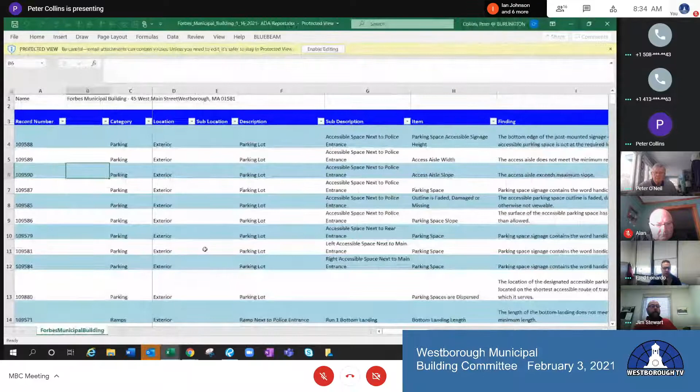I'd rather go back, Peter, if we can, just go back to the email. Certainly, that's the actual Excel report. So there's four major areas, if you will, that I still see as our potential to be addressed. The first one, I've talked to the facilities director. He and I are in agreement that if certain issues come up, the town will be liable for them. Some of those items are itemized, like the toilet paper holder.

There's some contention on how those toilet paper holders actually work, that you could actually have one of the toilet paper rolls at a higher place in the dispenser. So we think that may actually be compliant. But if we really get a complaint, Jim's agreed that we could look at replacing those with a different type of dispenser.

There was the numbering on the doors, that's completely, I wouldn't say completely out of whack. There's many doors that in the report aren't either in the right location, height, whatever. There's a variety of issues with the placement of the room numbering.

Again, we don't think at this point, the big thing are the bathrooms. We don't want people going to the wrong bathroom, obviously, so those are okay. Most of the public spaces, the fire room, those type of rooms are okay. It's the individual rooms, the stairwells, where they reported that the signs may not be at the right place. Rather than change all those wholesale, we'll leave those. There's nothing in the building code that I recall that actually requires labeling some of these rooms.

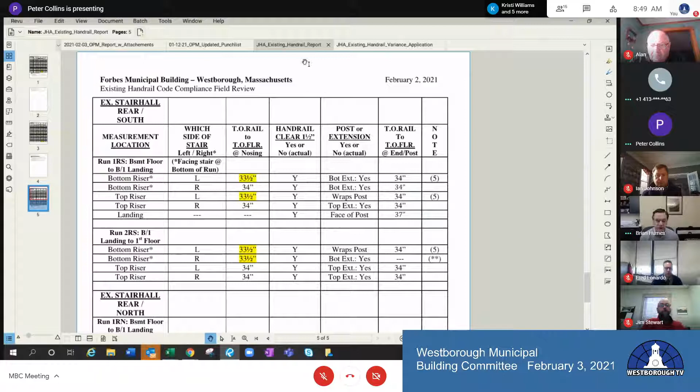I thought I needed a little more information on the actual conditions before I'd have to certify a variance request. So I sent Kevin to the Forbes building to do an analysis of the existing stairway and try to document what deficiencies were there, so we could certify those and be responsible for them in a variance request.

So there are 4 stairwells, and this is where it gets a little confusing, because when you're talking about these stairwells, they traverse 4 floors, and there's a left handrail and a right handrail. There are landings, and a lot of conditions within those stairs, which we needed to try to get to the bottom of.

Now we have measurement locations for the first floor, for the first to second landing, from the second floor. The second column is whether it's the left side of the stair or the right side of the stair, which handrail we're talking about. And there are certain conditions that we needed to verify.

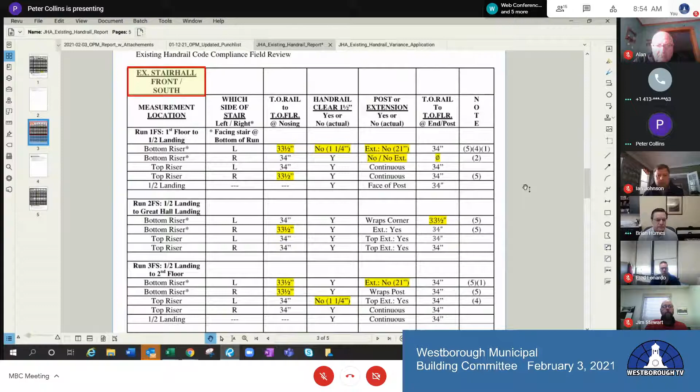Keep scrolling down, you can see where the yellow shows up. That's where we're finding a little bit of non-compliance. Again, it's just in small increments of 1/2 inch. Nothing really major.

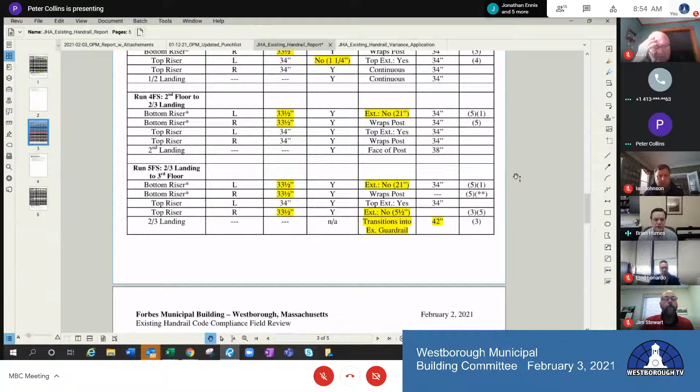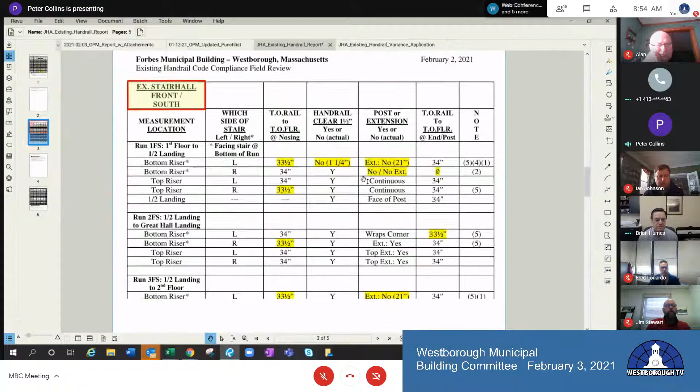When we get to, just go back to what you had. Okay, that's front stair south. Oops, I'm sorry Brian, which one? I apologize, a little more, a little down, a little more. Okay there, if you go to the bottom of the page, just above it says 2/3 landing, transitions into existing

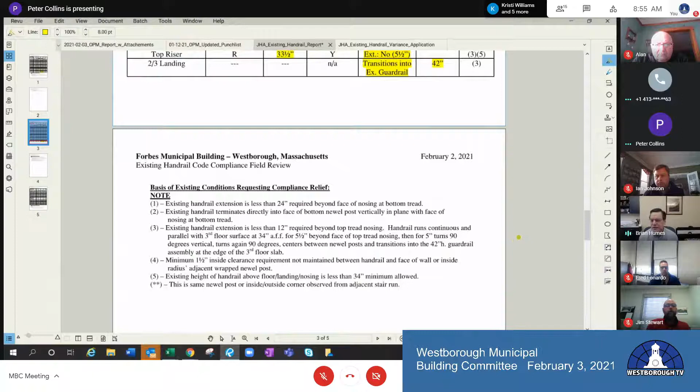guardrail at 42 inches. That's what's happening at the top of the stair. As the handrail comes to the top of the stair, it transitions to the last column on that page that's in yellow, 42 inches. The handrails come to the top of the stairs, all the way at the top landing, and they transition from a handrail to a guardrail. It's kind of an interesting design that they've implemented, but it comes to the top of the stair and goes from a 34-inch dimension. It turns up vertically and then horizontally to the sidewall.

So the handrail contorts itself to become the guardrail. In doing that, it brings it out of compliance for a handrail height, but into compliance for a guardrail height. It's just the way it was designed and built, and it's been in this condition since 1999, or for 20 plus years. So that's just a condition at those front stairs.

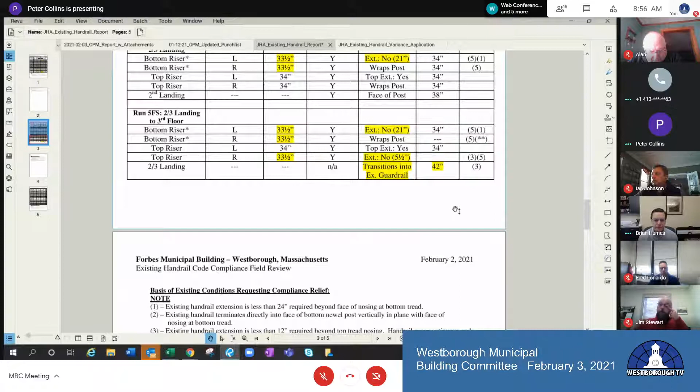And now we've looked at the 2 rear stairs. That's what this sheet is, existing stair hall rear south. We're finding handrail clearances are good. Handrail heights are off by 1/2 inch in certain conditions. It's the left rail, not the right rail.

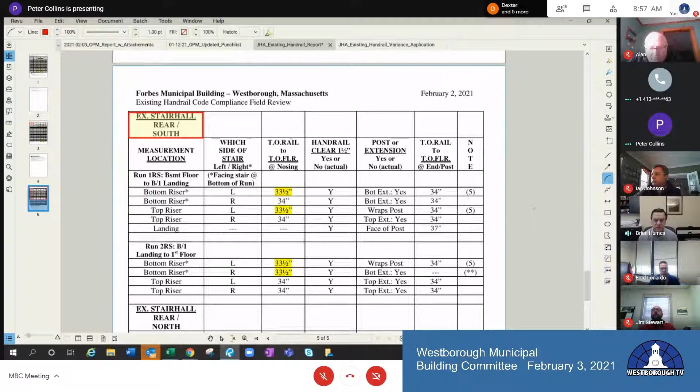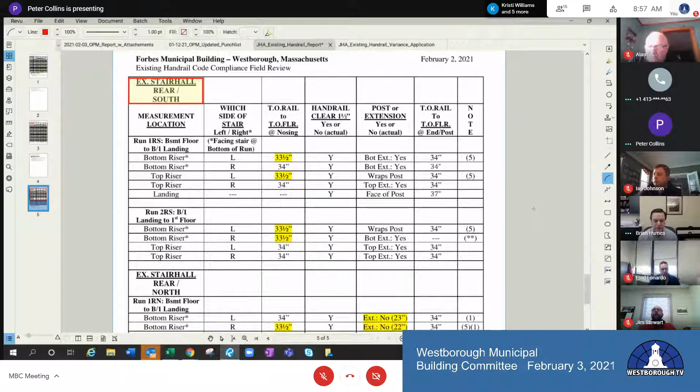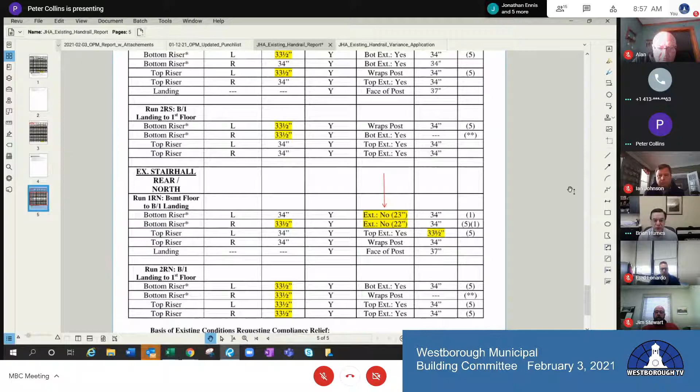When you're talking about extensions, required extensions at the bottom of the stair for a handrail extension, that's required to be 24 inches. On these stairs in the rear, we're finding that they meet the requirements. We had modified those stairs, those handrails at the bottom of stairs on the south, but the existing stair hall rear north, you can see that we have a 23-inch and a 22-inch extension, where code requires 24 inches. So we're off by 1 inch, 2 inches. It's not a major deviation, but those are the conditions that we're looking to get a variance for.

So any questions on just our investigative work?

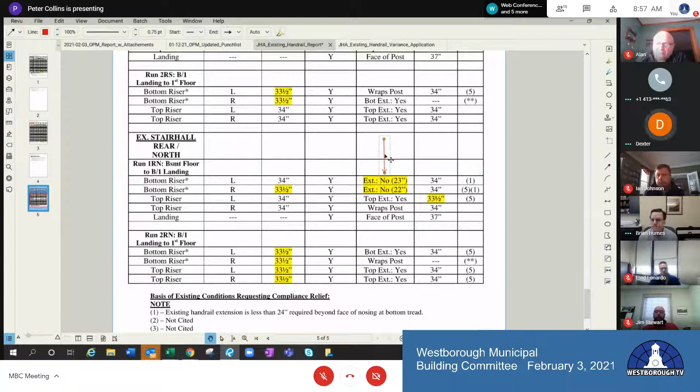Yeah Brian, I have one, Brian. Alan, if I may. Yeah, on the one where you mentioned the transition from a handrail to a guardrail at the top, where it went to 42 inches. What's the significance of that?

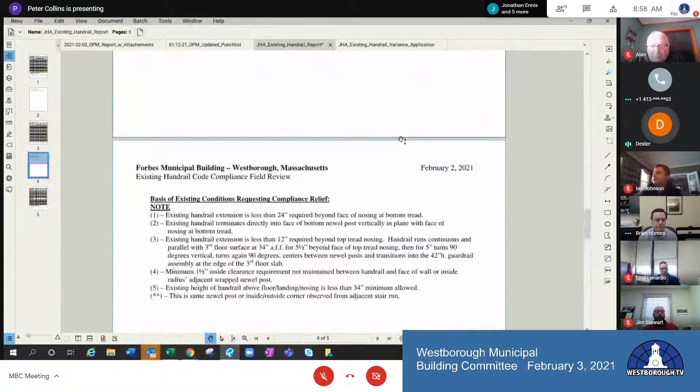If it's a guardrail, it's a guardrail. I mean, at the top of the landing where there's a fence so that you don't drop over into the next floor, it's not a handrail, it doesn't act as a handrail. It is a guardrail. So why is that an issue?

Well, at that condition, you're still required to have both. You're required to have a handrail extension, even though there's no stairs there. There's nothing that you can do other than drop off the world if it wasn't there.

You have to have the guardrail. One way to think about it, Dexter, is if you're walking down the stairs, you're holding the handrail, but you also have a guardrail that's beside the rail. So that same design should be extended to the topmost landing. The handrail would then extend and stop, but the guardrail would still turn and create conditions of safety. So you're saying there's a guardrail along all the stairwells as well as a handrail?

Yes, and what we've done in the renovation design, we extended the heights of the guardrails on those stairs. We did not change the condition of the handrails. What we did do is cut off the newel posts, extend the newel posts higher, and create a higher guardrail dimension, all without touching the handrail. But when you got to the top of the stairs, the handrail transitions higher to be the guardrail. So it's not something that would be a compliant design today.

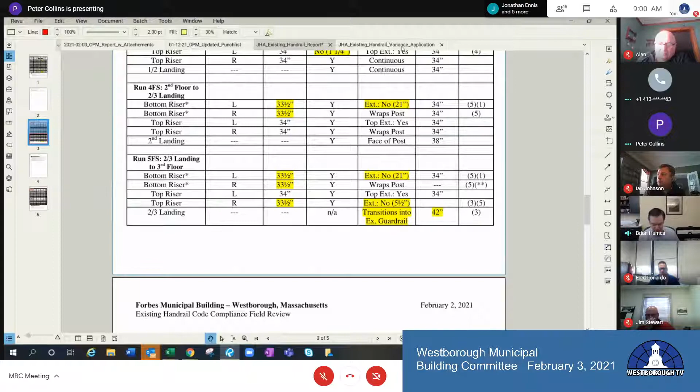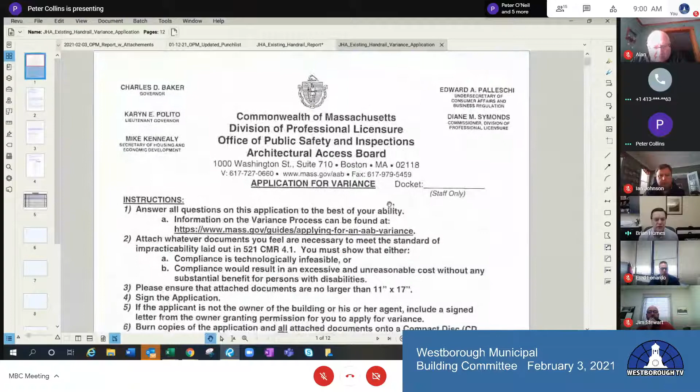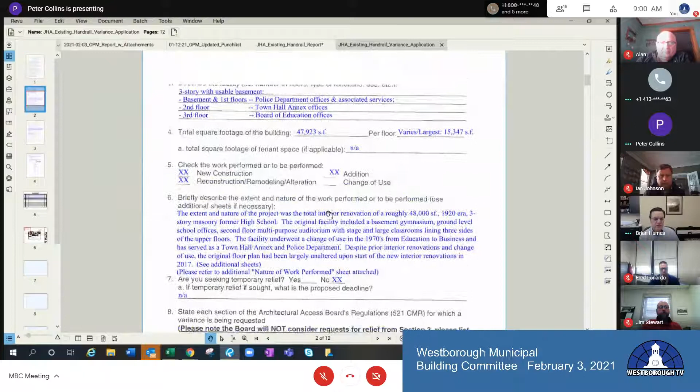So the next thing I sent you, Peter, was a variance request. We've taken that data and put it back into this application for a variance. We kind of patterned it off the one we had already submitted, so a lot of this information in the first few pages is repeat documentation. All of that data is data that we had from the former application. We had to change some of the wording because we're reapplying just for handrails at this point, but a lot of this data is still applicable.

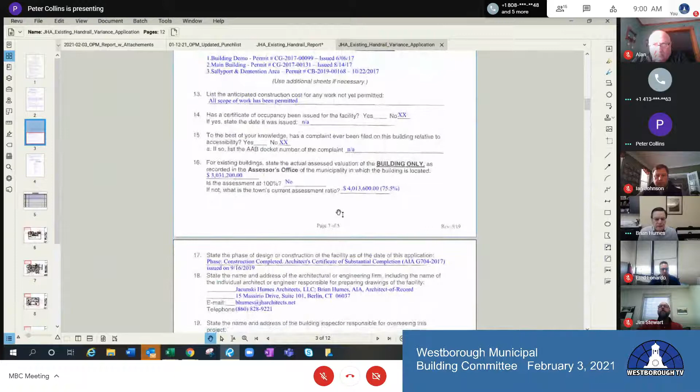It just states who you are and what variances you're requesting, cost of the building, and so on. So we'll get to the next page and you'll see items 2, 3, 4, and 5. In the past documentation there was number 1, so this is a continuation sheet, but we're actually asking for a variance for 5 conditions. Those 5 conditions are in multiple locations, but they still come down to just 5 basic things we're asking for.

One has to do with the 1.5-inch clearance. Some has to do with the 34 to 36 inch heights. If you look at number 5, that's the CMR condition, the ADA condition we're asking a variance for. The next column says location, and it says multiple locations. So existing handrail is less than 34 inches between top of handrail and top of floor landing nosing, where 34 to 38 is required. We're at 33.5 in a lot of these conditions. That's just one of the 5 items, but it's all over the place. It's in 3 of the 4 stairwells.

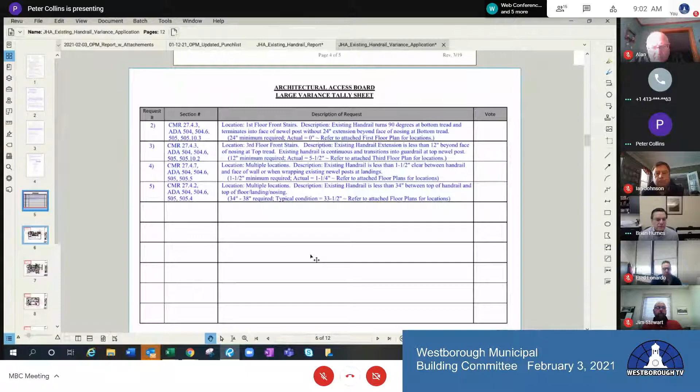So if you go to the next page and scroll out, in the upper left are the 5 conditions, and in those 2 rear stairwells we point to specifically where we found those deficiencies within that stairwell. The one to the left, the rear stair south, we're just asking for condition 5 at those 3 locations. So if the board was looking at this, they'd have some way to visually see where those conditions occur. I don't know if this makes our condition better or worse, but we wanted to be truthful as to where it was and how often it occurs, even though it's the same condition.

It's just half an inch out of compliance. It's not along the entire rail, but it's at those conditions at the rail. And we go visually for the next 4 pages. You can click on that one, Peter. So on this floor there's nothing in the rear stairs, it's only in the front stairs on this floor. Same 5 conditions, but we're just identifying where they're located.

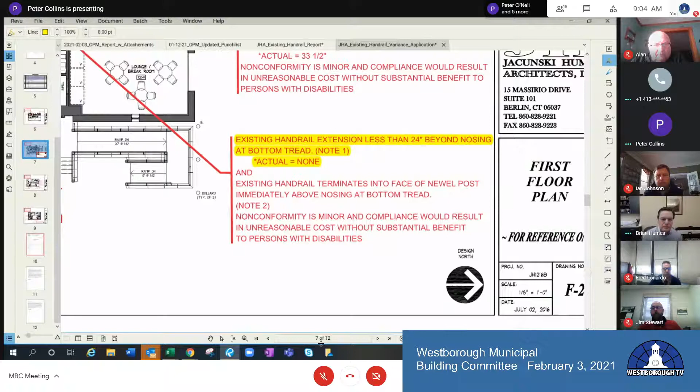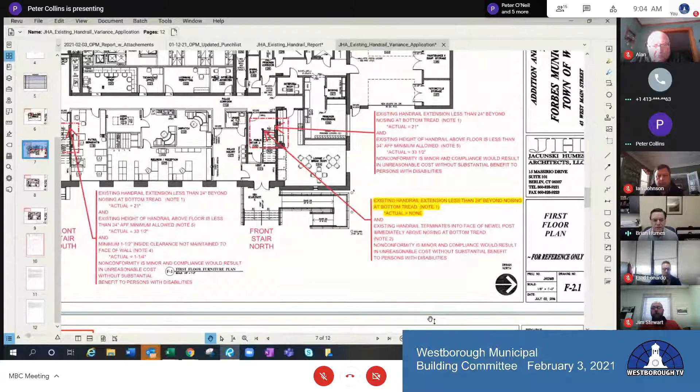These have to do with—I'll take the note in the bottom right for this—the 24 inches, so this is note 1, it's a handrail extension. The actual is we don't have an extension here at this condition, and we're required to have 24 inches. So for that condition they might grant you a variance, they may not. I don't know, because at this condition we have no handrail extension, but it's right at the bottom of the stairs, so we would actually be blocking some passage dimensioning at that bottom stair. That handrail at that condition just dies into the newel post. If it was extended 24 inches into that landing, we'd be reducing the landing width by 24 inches.

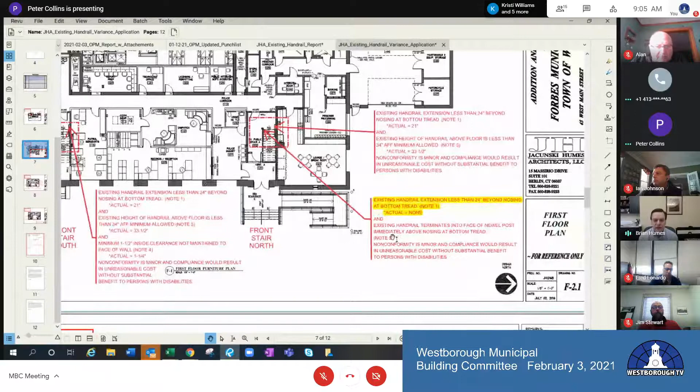So it's an existing condition, something that is part of the building, inherent to the way it was constructed. I'm hoping they give you a variance. The note just above that we looked at, the handrail to the right coming down the stairs, doesn't extend 24 inches, it extends actually 21 inches. So that's the note above. The handrail extends, but only on one side, and on the other side it just dives into the newel post.

So on the right side, it's at 33.5 at that condition instead of 34.

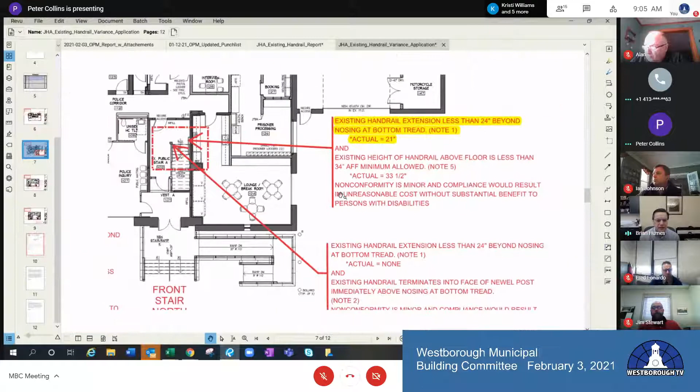I think we're now confident that we have the right information. The question is what's the best way to convey this to get a variance request. It was confusing for us to even contemplate how to do it, and we think this accomplishes it, but that's why we're presenting it to you to see if it makes sense or if it's actually a little confusing. So the next page, Peter, goes up to the next floor.

Again, there's no rear stair at this condition. When you get up to the second floor, there's only the 2 front stairs that extend up to this floor. So there's just parts and pieces that are still the same 5 items, though. It's not any different than we've talked about before. It's just showing it on this floor.

Brian, if I could interrupt just a minute before Fred leaves. I'm interested, Fred, in what your take on this is from your professional perspective.

Thanks, Dexter. So just a couple minor clarifications. One, Brian, you mentioned that the entire handrail is not off. That may or may not be true because Kevin measured the top and bottom risers. It's possible that somewhere in the middle too, albeit the deviation is not much. Like you said, if you get 33.5, it's possible somewhere in the mid handrail you could also have a deviation. It may not be at 34. So I don't know that I'd necessarily say the whole handrail isn't off, or it may be off, but the deviation wouldn't be significant, assuming 33.5 is correct. It shouldn't deviate much, but it's possible the mid rail could be off too. That's just a minor point.

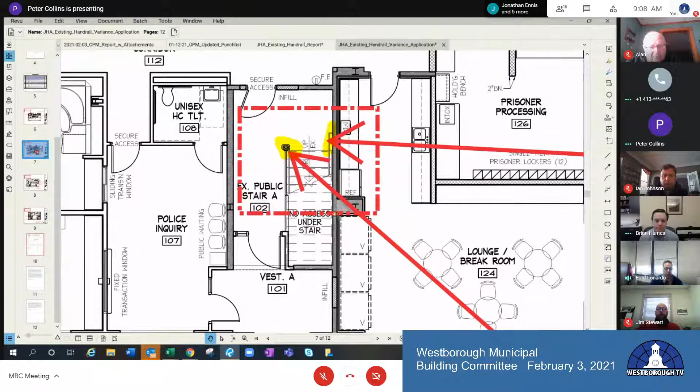I'd be curious to know how the board would rule on those. The one on the inside wall, yes, those have to extend a certain amount out because those don't present the same tripping hazard and they're not in the walking surface per se. No, otherwise, I think what Kevin and Brian have presented is good. Very good, actually. Thanks, Fred.

So the next page, Peter, just goes up to the uppermost floor. Again, we only have the 2 stairways in the front. Same conditions, same 5 items. This is the floor, though, that's showing how the handrail does contort itself to be the guardrail at the top of the stairs.

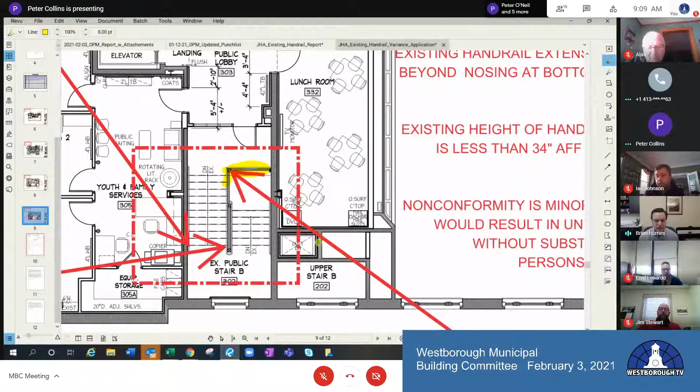So this would be some cutting and welding, extending the handrail height at least the 24 inches. And yeah, Fred, we could turn that 24 inches to be 90 degrees to the stairwell, but we still need that extension on the handrail independent of the guardrail. And those are happening at the top.

Yeah, so the handrail along the wall is compliant. The handrail along the wall gives you what you need at the top of the stairs. The handrail at the newel post doesn't.

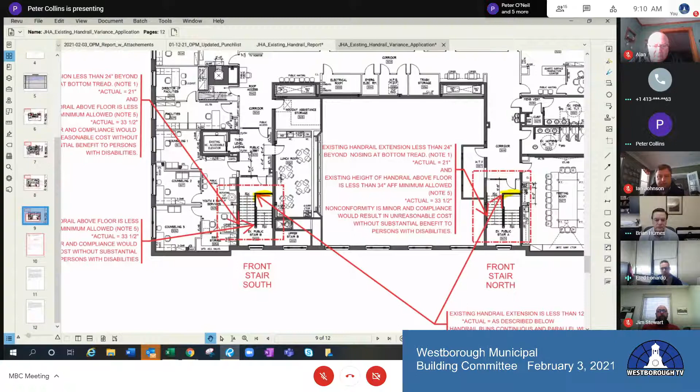If I may just interject, so Dex, that goes to your point, or your question earlier, is that at the bottom or the top of each landing, you're supposed to have some way to extend those handrails out or return them or bring them along. So you can't just transition from 34 to 38 inches and then just kind of gooseneck it up to 42 and consider that part of the extension, if you will. You can't do that. You have to make an independent extension or return or something from the handrail. You can't just go into the guardrail.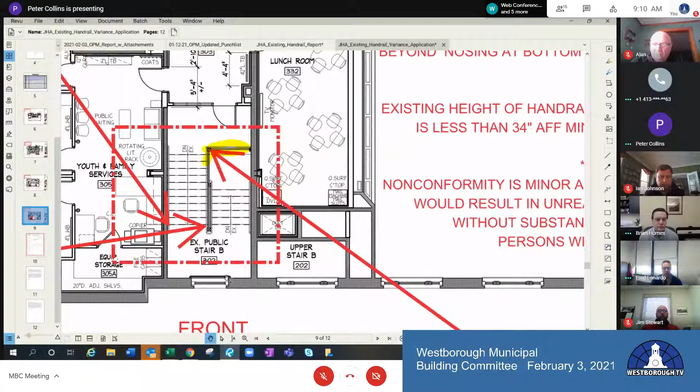And it's interesting that only happened in that one particular area. Surprised it didn't actually come up in other areas. So we're lucky in that regard. We only deviate in one spot, I guess. Yeah, it's only at the topmost landing in both stairs. It's the original design that we didn't deviate from.

So the next page is the letter we received from the town. I think this is the one Kristi wrote for the last variance, and I still think it applies, but the question is, do we want to update it for this variance with a new date, or just keep this same letter? I think it just says we're doing it on behalf of the owner. I'm comfortable if you want us to use this letter, or if you want to give us another one.

Kristi, how do you feel about that? I mean, I'll do either. It's simple to just print out a new letter with a new date, so if you want to do that. I don't think any of the information changes, so I don't think we'll have to. We'll put this letter into the variance request.

And I think that completes what we're planning on submitting. We wanted to show it to you first and see if you had any questions or modifications before we send it off. We have to send this out to Worcester again, to the advocacy group within your community, independent living center. We did that last time.

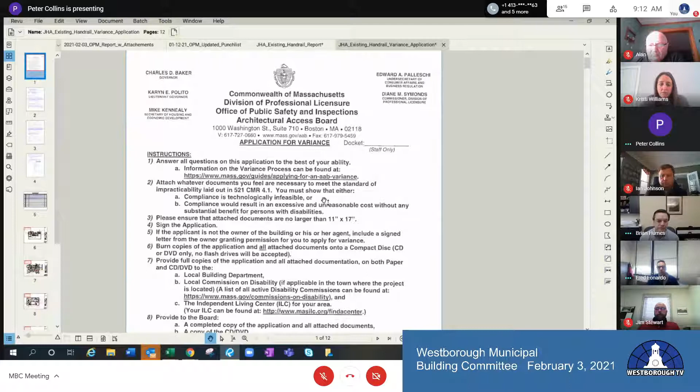Brian, if I may, the only question I'd have — and I think the presentation was great, thank you for doing all that — is, if I'm on the board, the one question I think might come up is, why didn't we apply for this originally? And it's okay to throw me under the bus on that response if you need to.

Well, I don't know if you also want to write a letter, Fred. We can add another letter to this if you want, since we have to submit this to you as part of our application process. So they know it's going to you, but you could always add a letter saying that you're in support of this. It may be something the board would read and know that we're not just doing it independent of your input.

Yeah, I can do that. I just don't know, if that question comes up, how we answer it. We were waiting to get more documentation, I guess. Yeah, that's a reasonable response. I don't think I'd put it anywhere, but I'd just be ready to answer that question should the committee ask you that.

That's the only thing I have as a comment. I think it makes sense that, based on the measurements being so close, that we as a town wanted to do our own independent measuring prior to applying for the variance.

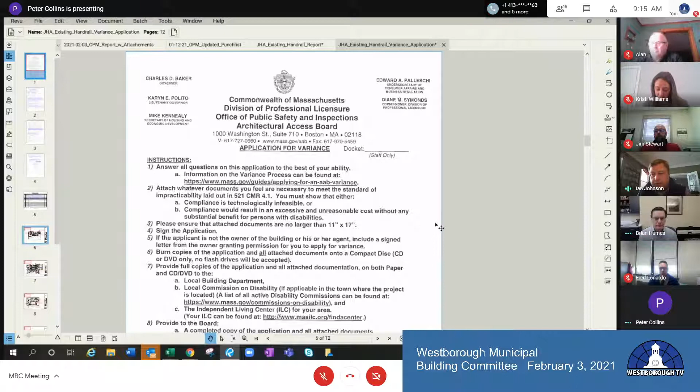Al, this is Ian, can I just make a — yes, go ahead, Ian. Sorry, and again, I'm by no means an expert on this, but I'm wondering — because when I look at this on the surface, with all the red on the maps and pointing stuff out at different points, it looks complex and there's a ton of things there — if there's a letter, whether a cover letter or something, that really highlights that.

While you'll see a lot of things here, they're really the same items in many spots, because a lot of it, when we looked at them, it's 33.5 versus 34 — not huge differences, and it's consistent being an old building. Whether that would help or not, I don't know what the board will say, but when I look at it at first glance, if I was on the board — which I'm glad I'm not — it would come across as, wow, this is way too much for us to grant a variance for.

So I guess my question is, is there any way to do something that just highlights this in a cover letter? Or maybe you've already done it. I guess that's my question.

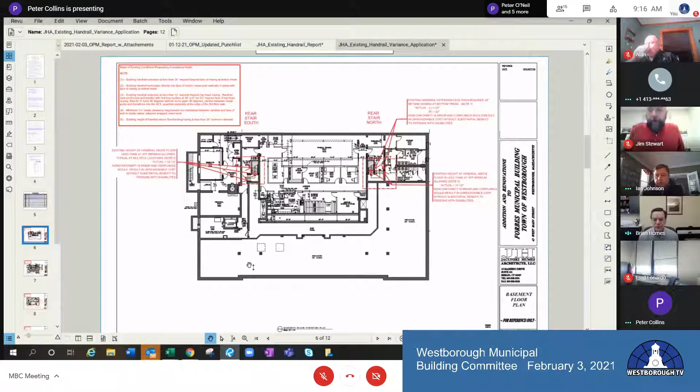We try to be transparent. We could have just not included all these diagrams and said we only have 5 conditions we want a variance for. Instead of a 24-inch extension, we want a variance to go to 21 inches. That's our worst case scenario, actually 0. But are we asking for a variance just to go to 0 instead of 24? Well, that only happens once, at 21 inches in 2 locations, 22 inches at a couple more locations. So that's where it became really complicated for us. We tried to boil this down to show them where these occur. The 24 inches we understand is the requirement, but are we asking to go to 0 in all cases?

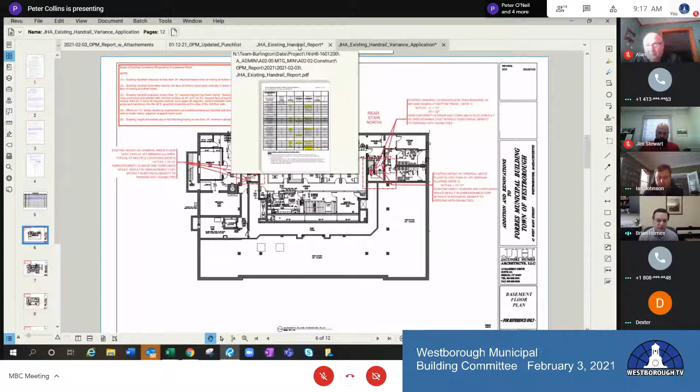No, we have extensions, but they're not to 24. If you take just one instance, eliminate all the maps, and just say, can we get a variance for everything that's in yellow on this chart? I don't know if that's enough information for them to really know the conditions at the stairs, where they are, how it's located. But we have all this documentation. It'd be nice to find a way to get this simplified, but I understand the concern with complexity. I think we're being accurate by what we're asking.

The deviations are really small, though. I don't want to make this seem like these stairwells are a public hazard. They're not. Walking up and down, the difference between 33.5 and 34 inches is imperceptible to the public. They still have handrails. You're not going to know the difference — it's only because I just told you that now you're aware of it.

So I think the 33.5 to 34 is going to be an easy one for them to get their hands around. The 21 to 22 versus 24, I think that's easy for them to get their head around. 1.5 inches to 1.25 inches, I think that's just what we're asking for, a modified relief. We have a couple oddballs where it goes up to 42, where we talked about the upper landings. I think they should be looking at those independently, and the mapping gives them the ability to do that. I'm encouraged, pretty positive about these other half-inch discrepancies. I think that's what the variance requests are for.

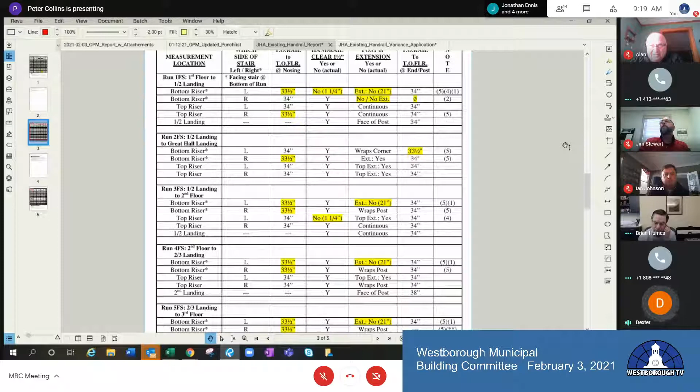Who's that question to? Is that question to me? Yeah — the original letter that went with the original application for the variances to the AAB, did you assist Kristi in writing that letter? No, we just requested a letter from the town.

Well, okay, Kristi, if you don't mind, can I ask Brian to help you draft a letter that's going to suffice for this next application for variances? Sure, yeah, that's fine. I mean, Fred and I just did this one — it's pretty simple, but happy to have more information. Brian, you've had experience doing this not only for Westborough but for other communities I'm sure. So perhaps your expertise in how to word this would be helpful.

Well, I think the letter you're referring to is all we needed from Kristi. That letter just gives me the authority on behalf of the town to submit the application. I think my letter was just this paragraph — the other stuff was written by Brian.

Okay, well so then, Alan, do we need a motion to authorize this to go forward? Yeah, we can take a vote on that. As we said initially, we're going to have Kristi resubmit the letter with a different date on it, and Fred's going to add a letter to it. If you think we need a motion, that's fine.

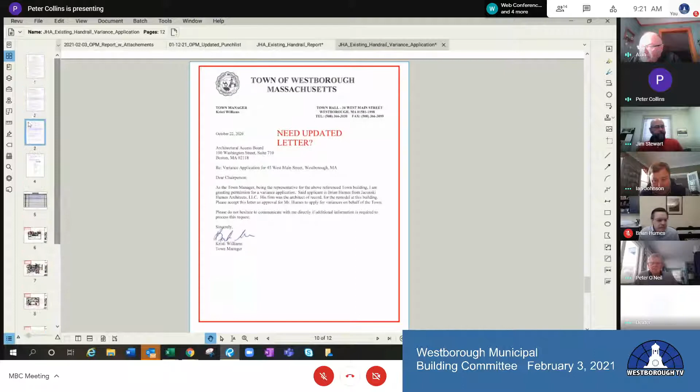A motion from Dexter. Do we have a second? I'll second that — Peter can second. Ian O'Neill, Ian Johnson second. Do we have any comments or questions? No comments, questions, so I'll do a roll call vote. Dexter? Aye. Peter O'Neill? Yes. Jim Stewart? Yes. Ian? Yes. Al Gordon, yes. So it's unanimous. Okay, thanks, thank you Dexter for doing that.

When we get those letters, we'll submit these. It does take a couple months, and we anticipate this to take a couple months before we hear something back.

Okay, I think we've wrapped this up. You want to go back to Peter?

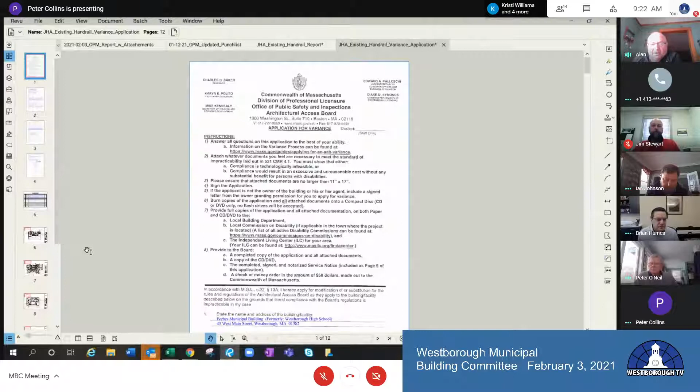Certainly. Thank you, Mr. Chairman, committee members. Back to the report itself, if you'd like. We move down to item 3.

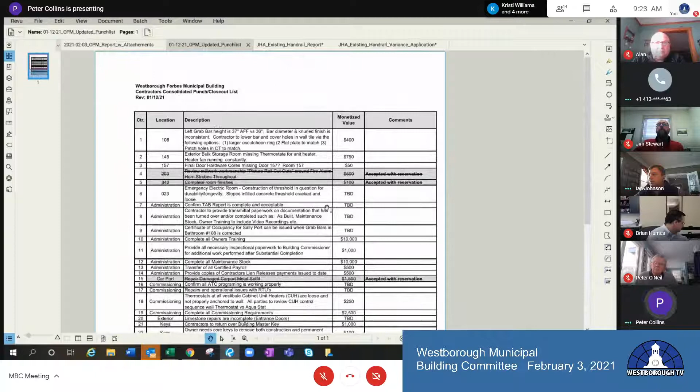I'm going to ask for some input from Jonathan Ennis from 5 Star on the updated punch list that we did a walkthrough on January 12th. Jonathan Ennis, Matt Rex from 5 Star, another representative from the bonding company also was with the group, along with Fred Leonardo, Jim Stewart, and myself. We went through the punch list, which was this list. I updated it. I sent it out to 5 Star and Fred and Jim based on the results of the walkthrough of the 12th. So Jonathan, if you like, you can tell us what you have scheduled ahead for completing some of the open items.

So I did actually respond to your update on January 19th. About a week after our walkthrough, there was some discrepancies. I haven't actually seen your newly updated one, so I can't specifically comment on that right now. But I know that there was a couple final things. I think there was some extra keys that were going to be dropped off. We had planned to do them a little sooner, but our help got caught up. So this Friday, when they go to do the handrail, the extra keys will be dropped off. And I believe there was one other item that will also be taken care of, I'd have to pull it up. But besides that, there was the training, which we've been getting really close to finalizing the last days.

We had the electrical set up this week, but due to the weather, we're actually rescheduling that now. We've set up one control day for the HVAC system that will happen, I believe, on the 24th. And we proposed the actual HVAC training to be the first week of March, which would take care of the training that Adams owes. So we're, I would say, a week or two away from having the final dates set in stone. As long as no weather issues come up, we should have the training completely done.

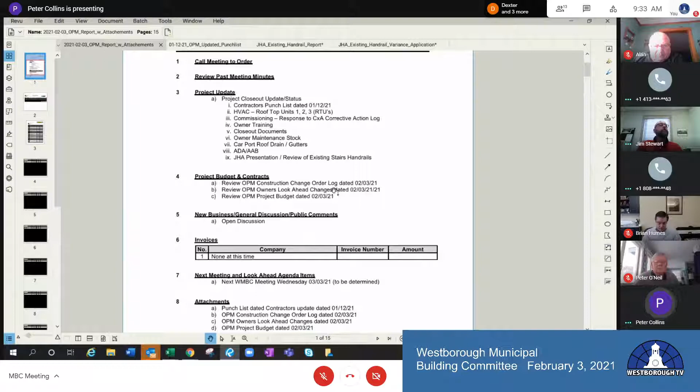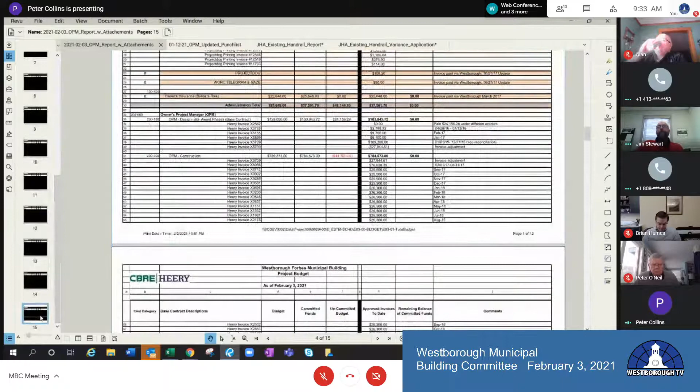I have them attached. There's really no change from the last time we met. You did receive a copy of this in your email. Same items, just a different date. The budget's been updated with any invoices to include a review from the town accountant's office through the Munis report as of the 22nd of January, as noted in the bottom left corner of the last page. So this budget reflects encumbered money, invoices paid with respect to how the OPM is tracking it, and to the best of the OPM's ability, based on reports from the town accountant's office as well.

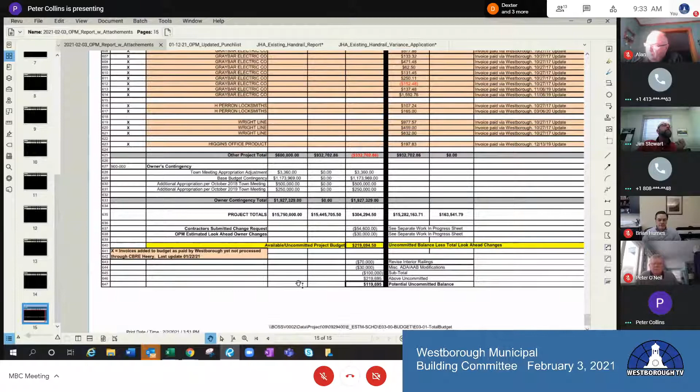Next item, if there's nothing there, item 5, it's kind of an open general discussion, if there's any. Maybe this might be the right time.

Can we discuss the email that was sent out, I believe it was yesterday, regarding the testing done on the HVAC units? We can, I would like to speak with Adam, AJ Roberto, about that. I can't actually speak on the report myself, that is beyond me as far as the testing goes. I know that they did see some odd spikes on one of the days, and they are suggesting that they do testing again come spring when there's a heavier load on.

Jonathan, should National Grid be brought in on this also? I'm not sure if they do their own testing. I just know that the company they called was another third party. I'm sure it wouldn't hurt to have National Grid in on it, I just don't know how we would get them involved. Well, I question on some of this, if National Grid would find this within their specs.

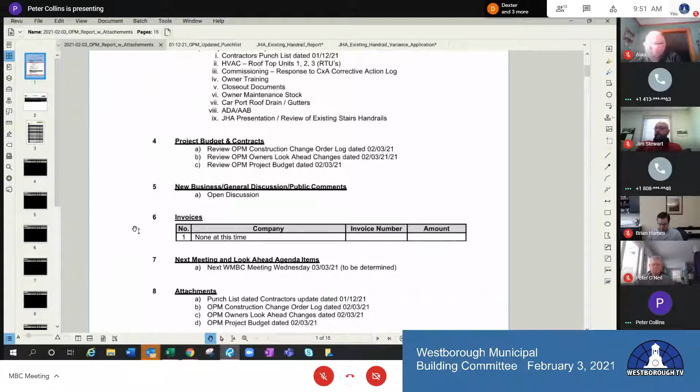All right, back to Peter. Mr. Chairman, committee members, if there's nothing else on item 5, we'll go to item 6. Hold on one second, Peter - I did want to bring up our PayRec 33 and PayRec 34.

Peter, can you update us on what those invoices are and how much they're for? Yeah, I'll check with the town after this call to find out the status. Okay.

That's all, there are no other invoices to report this period. Item 6, item 7 - have scheduled the next meeting a month from now, which is the first Wednesday of March, which would be March 3rd.

Any comments in regards to that? Fine by me. Peter O'Neill is okay with that. Jim? I'm fine with that. I'm fine with that. Ian? Ian left, I think. Okay.